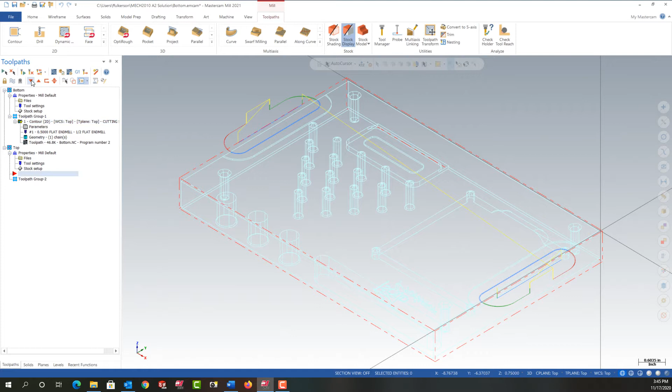So now I want to add a contour toolpath to this part. So I'm going to move that red insert arrow down to the bottom. Notice how the stock has changed. Next, I want to go to levels, and I'm going to make level 100 active, and I'm going to turn the visibility of level 1 off.

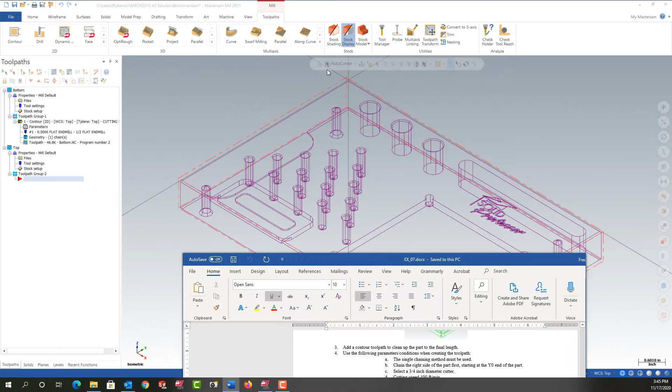Then I come back here to toolpaths. I don't want to see this previous toolpath, so I'm just going to turn its visibility off. And now I'm ready to go. So I need to read the assignment sheet. So I'm just going to bring the assignment sheet into here for a second. And what do we need to do?

We need to use the single chaining method. We're going to start on the right side first at the Y0 end of the part. I'm going to use a 3/4 inch cutter, cutting speed of 400, feed per tooth of 10 thou. Plunge rate is 25. I'm going to add comment. I'm going to set the step down to 0.4. I'm going to leave 25 thou on each side for a finished cut.

So that's another toolpath. Okay, the bottom of the cutter must be 25 thou below the bottom of the part. And the cutter must arc on and off the part with a motion. So we want to read all this, and the arc motion ending 25 thou before the part and arcing off starting 25 thou past the edge of the part.

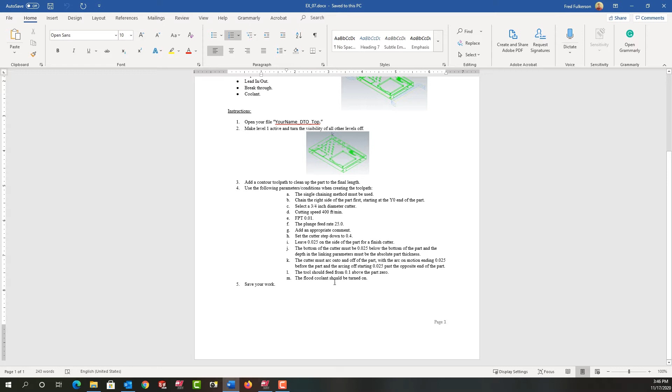The tool should feed from 100 thou above the part, and the coolant must be turned on. So there's our assignment sheet. Let's just get it out of the way here. And now how do I want to do this? So I'm working from a solid, but that's not a problem. First thing I want to do, so I'm on the right part, I want to double check that.

The part looks right, and I'm going to tell it I want to make a contour toolpath. So I'm going to select the edges method of selection, and I was told I can only select a single entity. Now I've got a couple options. I could go ahead and create geometry if I wanted at the proper Z depth and the proper length. But all I really want to focus on is getting one entity that's the proper length.

And I need to start from the Y0 end on the right side of my part. So this entity here is what I want. So I'm going to select it, and it shows me it's selected this, and it's stopped at the loop. That's not a problem. I'm going to come down here to the branches and just tell it to back up. So that is what I want. So I'm going to say, yeah, end that chain.

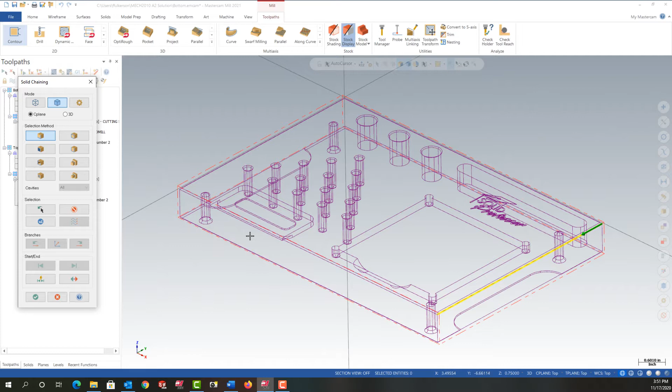And now to make sure, I'm going to move this window a bit, that the cutter's on the same side, so the cutter's outside the part. When I get over here, I'm going to rotate around a bit, and again, I'm going to rotate right around, and I'll zoom in, and I want to select this part edge now.

Let me zoom back out, and again, it's gone too far, but that's fine. I can just tell it to back up, back up, back up, and now it has the proper entity selected, and I'll say, okay, I'm done selecting edges.

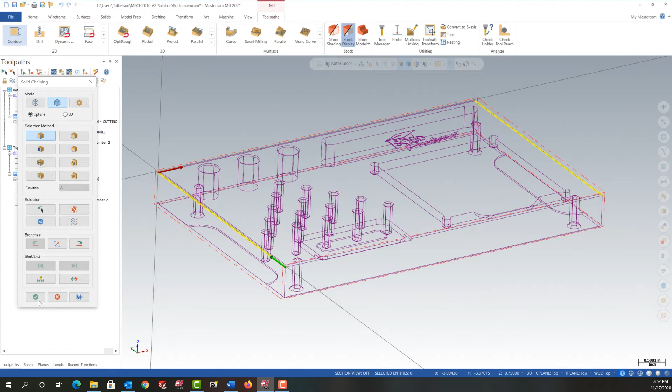So my next step is come down here to the tool, go into the tool library, just move this over a bit, filter. I'm looking for flat bottom end mills, but this time they have to equal 3/4 of an inch. I'll say okay. There's one in the library that suits my needs.

So I'm going to say okay, and okay again. So I've got that 3/4 inch tool. I'm going to always turn on rapid retract. I'm going to set the cutting speed to 400. I'm going to set the feed per tooth to 10 thou, the plunge rate to 25, and I'm going to add an appropriate comment with the caps lock on.

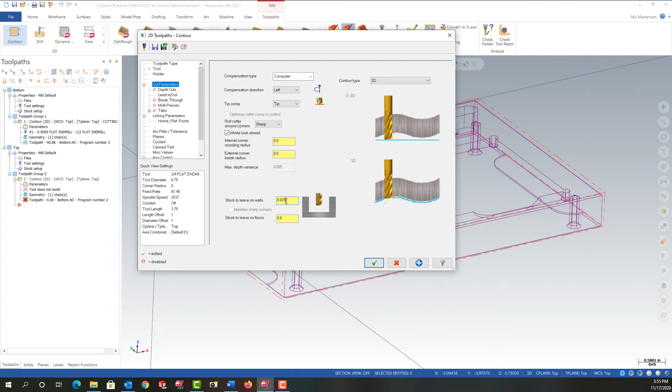So I'm going to tell it to machine ends to clean up, and I'm going to say leave, and then I have to go back to my sheet and see what it told me to leave, and it was 25 thou, so I'll add that in the note, leave 25 thou for the finished cut. So next step, go to cut parameters, and I want to look here. Again, here's where I put that 25 thou to leave for the next cut.

The lead in and lead out, it had a note there. For the lead in and lead out, it said the arc motion must start and end 25 thou before the contour. So I'm going to come down here and adjust the start of the contour, and I'm going to extend it. Here would be % of the tool, but I'm told the actual distance. So I'm going to enter 25 thou. And I'm going to tell it to copy it to the end, and that'll take care of that 25 thou. That'll tell the tool when it arcs on to finish its arc 25 thou before this edge of the part.

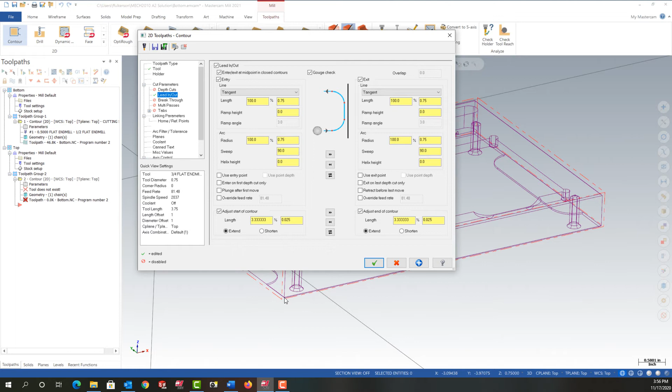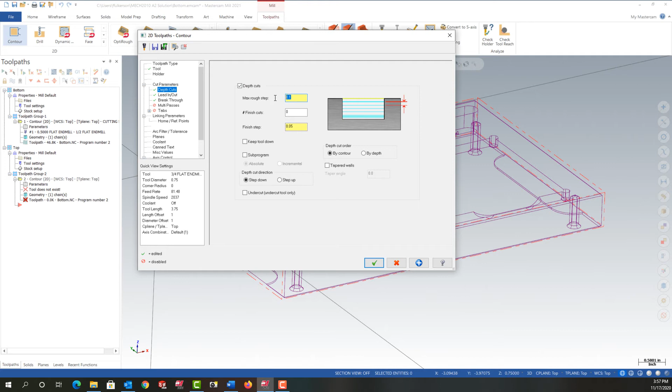Then next I want to look at the breakthrough because it tells me I need to go 25 thou past the bottom of the part. So I'm going to turn that on, set the amount to 25 thou. So I want to go back over my assignment sheet and I realized I missed the step downs. So I'm going to turn on the depth cuts and it says the step down must be 0.4. So I'm going to set the maximum step down to 0.4. The sheet doesn't mention any multi-passes or step over, so I'll leave that.

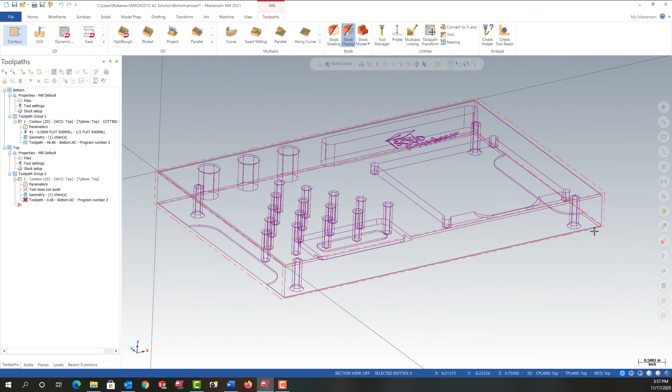And next I want to go to linking parameters. I'm going to make these all absolute. And it tells me once again I need to start 100 thou above the part and that the depth needs to be the bottom of the part. So I'm going to click the depth button. I'm just going to rotate around and make sure I can choose a piece of geometry that's on the bottom. So there it is. So I've got that 3/4.

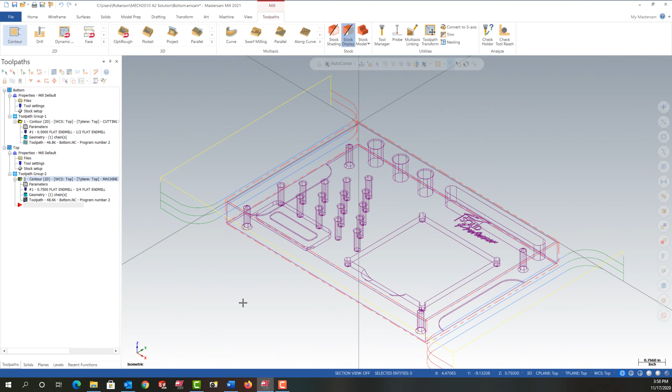The last thing I want to do is turn on the coolant. So I'm going to say OK, turn on the flood coolant, and then I'll say OK, create the toolpath. Let's right click and look at this isometrically, and we'll double check it and it looks good. And the next step again, reread the assignment sheet, and it says in step 3, add a contour toolpath to clean up the part to final length, meaning, okay, here's the roughing that we just did. Now I need to add a finishing toolpath.

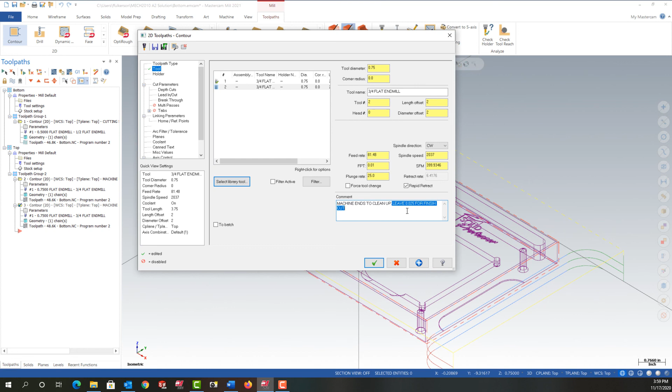So to make it easy, I'm just going to right click and hold on this toolpath, drag down below the red arrow, release, and I'm going to tell it to create a copy after. And then I'll move the insert arrow down. I need to go into the parameters, into tool, and I'm going to grab another 3/4 inch cutter. So I'll say OK. So this time I want to change the comment. Whoops, it's warning me. One exists. Do I want to add a new one? Yes. So now I'm going to select this comment and I'll delete it. Everything else will be the same here.

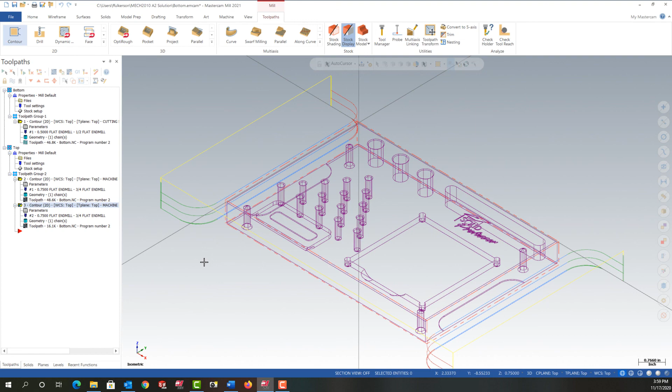I'll go to cut parameters. I can't leave 25 thou. That's what this is taking. I'm going to uncheck depth cuts because I just want to take that 25 thou in one pass. So everything else should be the same, and I'll say OK. This will need to be regenerated because it's slightly different. Now I've created the contour for this end of the part as well as the contour for when the part's flipped over on the bottom. And in the next video, we'll pick it up from there with the next set of instructions.